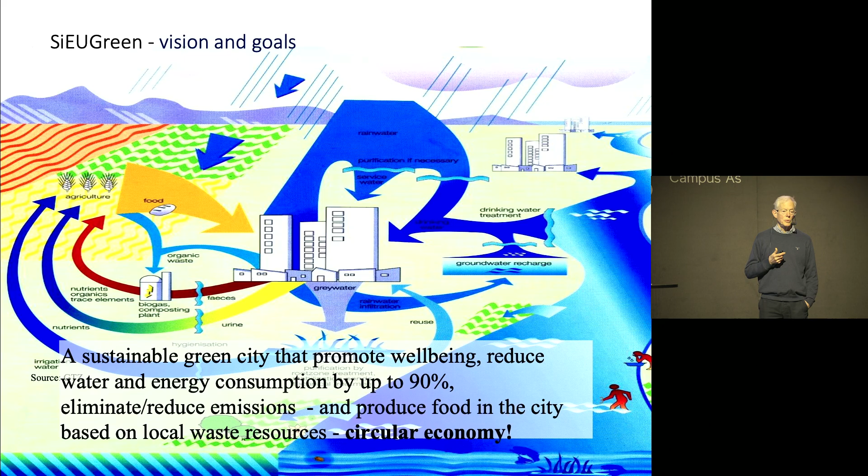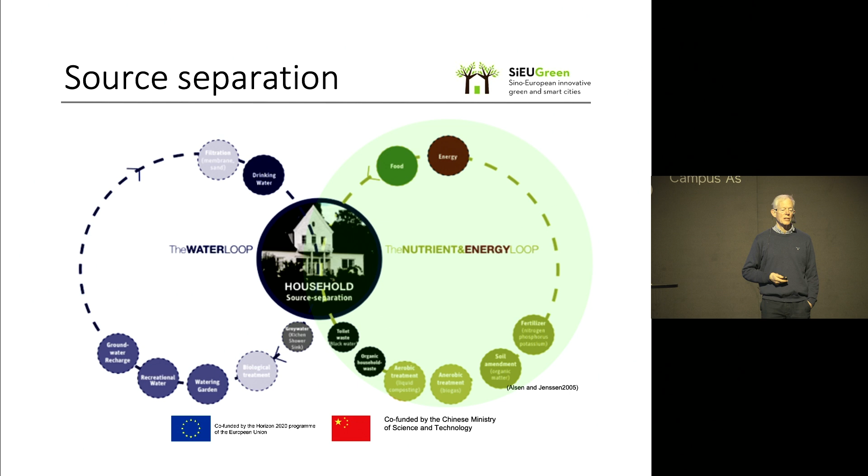So that's circular economy. To do so within the wastewater sector, it's natural to go to something called source separation. I don't know if you know what that is, but that means we take what comes in the toilet, in the loop you see there to your right, and we can make energy, fertilizers, and subsequently food that we return back to society. We can also take the rest of the water and return it to various purposes, even drinking water.

And why is it like that? What we excrete in a day is a mere 1.5 liters, and that contains the majority of the resources: 90% of nitrogen and phosphorus, plus other nutrients, more than half the organic matter, and of course most of the pathogens. And this we mix with 150 liters of water, just make it run through the pipes to the treatment plant.

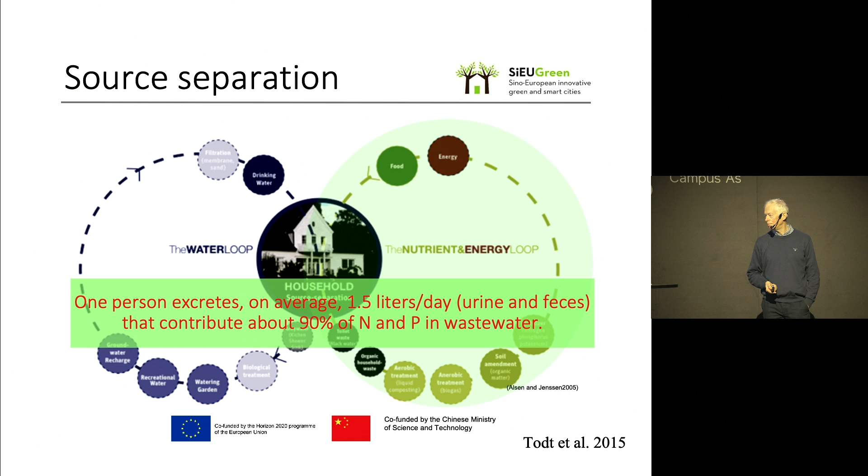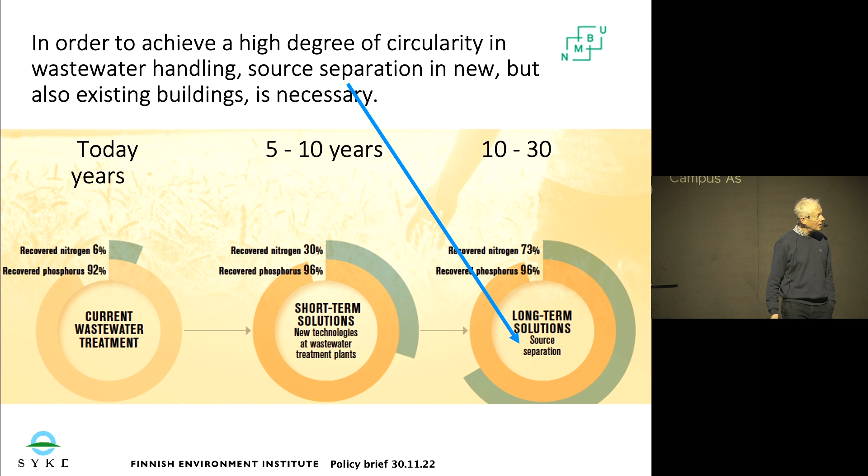If we start from scratch today, I don't think we would have developed a system like that. We would do like we do with solid waste, go to source separation at the source, and then we can have an interesting development. It's also pointed out by the Finnish Environment Institute that if we really want to recycle or recapture, for instance, nitrogen and phosphorus, we need to go to source separation ultimately, not only in new housing areas, but also in existing ones.

And this is what we have demonstrated here at Ås. There is a lab here up on campus, headed by Professor Arve Heistad, who's not here today. And there we took the wastewater from the student housing using vacuum toilets, because we need to use a toilet that uses little water. Vacuum could be one such option.

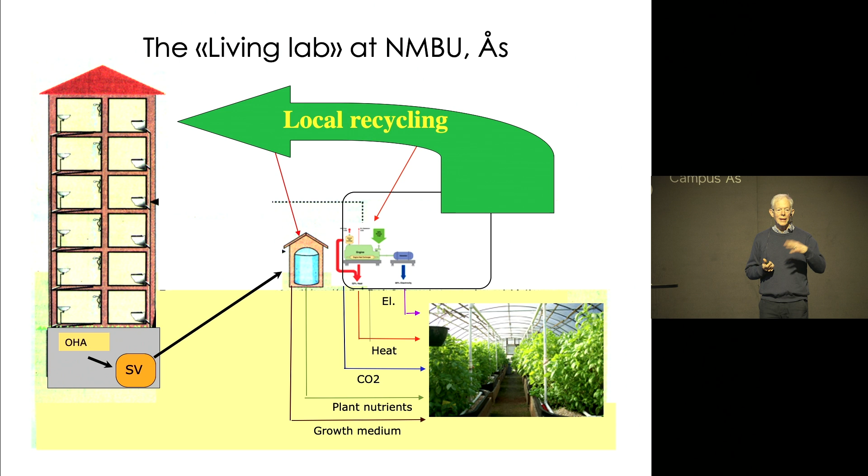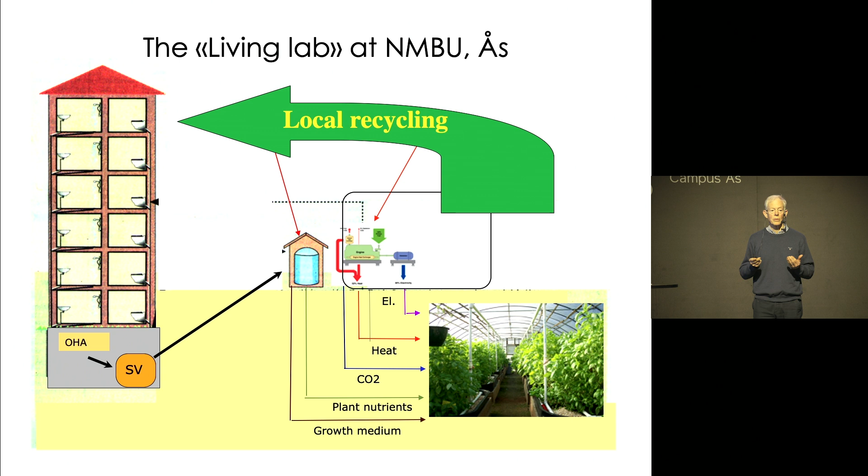And we take this wastewater into a biogas reactor. We could also add the organic household waste to make more biogas. And when we burn off the biogas, we can co-generate electricity. We have heat that can be funneled to a nearby greenhouse. We also have CO2 that can be funneled to the greenhouse, and we have a lot of plant nutrients in various ways that we can use to grow vegetables. And what we filter off, we have composted and made into a soil amendment product.

Melesse has been a very active postdoc in this project, dealing with many interesting developments. Here you see it take the biogas digestate, and he has grown algae. We heard about algae by Dr. Gupta. Algae in our project removed more than 90% of the nitrogen and phosphorus, which was in the algal biomass. Algae can be used as fodder, organic fertilizer, soil improvement, and we heard also other things in the previous talk.

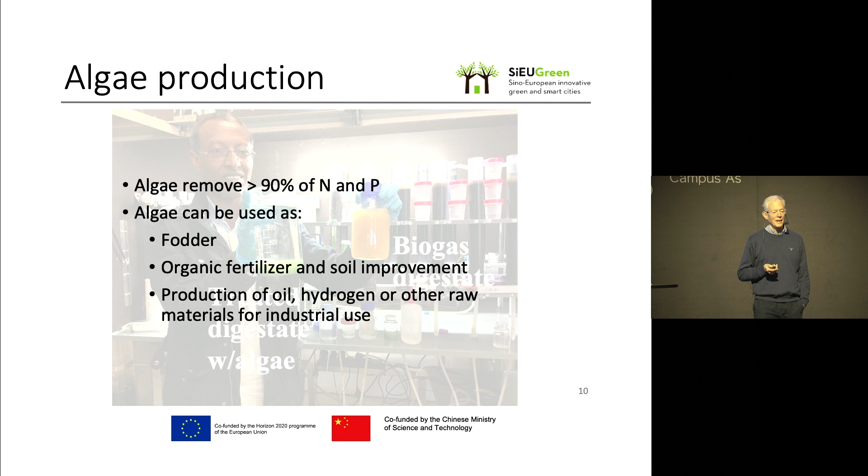Can produce oil, can produce hydrogen, biodiesel you heard, many things for industrial purposes. So here are many commercial options in the green shift, creating new jobs.

We also produce something called struvite from both urine and digestate. Struvite is the same mineral as in kidney stones, magnesium ammonium phosphate, and it's a slow-release fertilizer containing nitrogen and phosphorus.

It's also certified in organic as well as conventional agriculture in Europe. And Melesse has at least four pilot projects, ways of how to generate struvite that can be commercialized. There are commercial systems today, but here are more possibilities, also to do this in smaller scale.

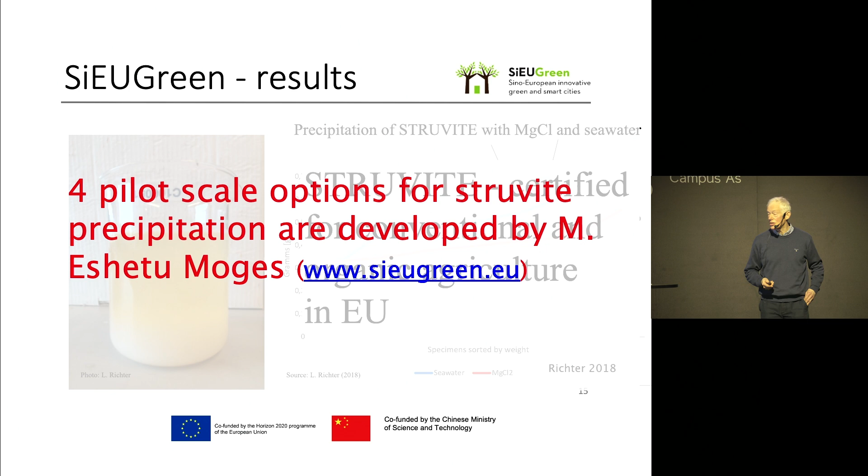We have a greenhouse here at campus, right next to the biogas reactor lab. This greenhouse is insulated by soap bubbles, so we have good insulation in winter, also insulation against heat in the summer. We can grow year-round. That was our goal.

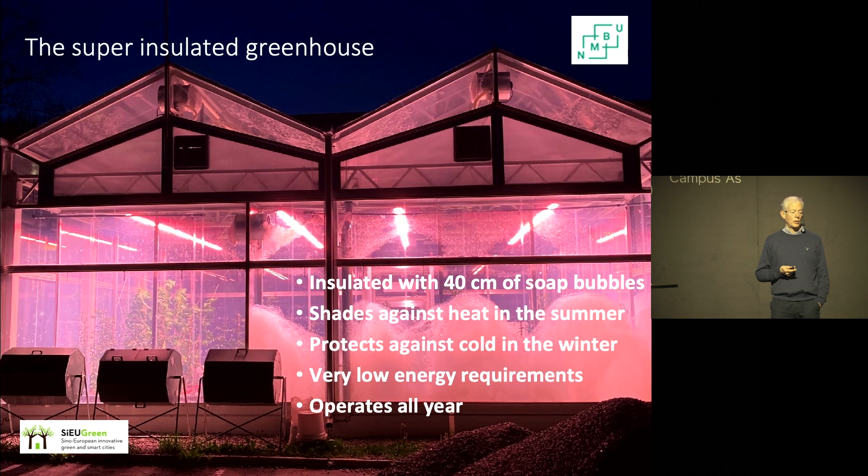Another advantage of this greenhouse is that it has a different ventilation from other greenhouses. You can funnel CO2 there, you can raise the CO2 level, and a higher CO2 level is more optimum for growing plants.

Greenhouses is something I see that will come. This one is from Berlin. I saw in a Swedish commercial paper that many investors in Sweden were talking about producing larger amounts of tomatoes and other crops in greenhouses in Sweden, that this was becoming profitable.

This one in Berlin was on imported resources. We used the waste from the city, and we can grow a lot in a city. This is an example from greenhouses in Norway, 150 kilos per square meter. But imagine if we stack them, we could boost that per square meter.

And in the city of Havana, they produce, not in greenhouses because they're warm climate, 60% of the vegetables that they consume are produced within the city limits.

When we started a project, we didn't think we could produce any energy crops. We did a little experiment with pallet boxes and grew 35 kilos of potatoes per square meter. That equals 350 tons per hectare, which is about 15 times as much as a farmer is happy about if he gets it in his field.

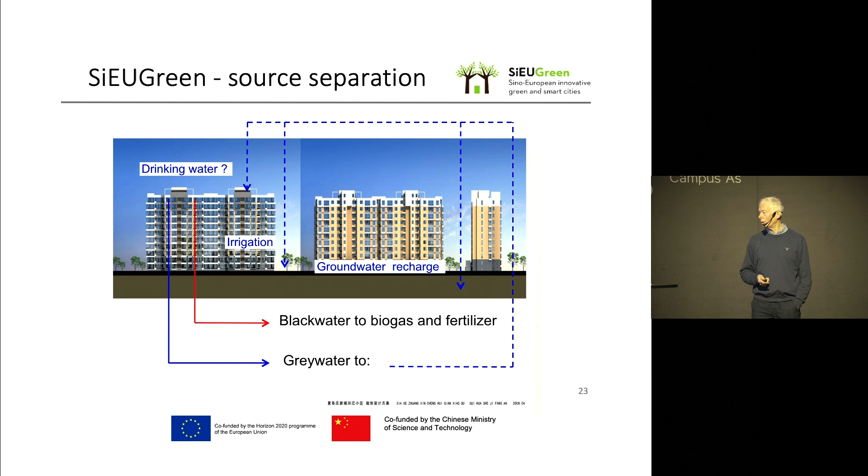We have made biogas and fertilizer from the black water, that is what comes from the toilet. What about the grey water? The grey water, when you use a vacuum toilet, constitutes more than 90% of the water flowing out of the house.

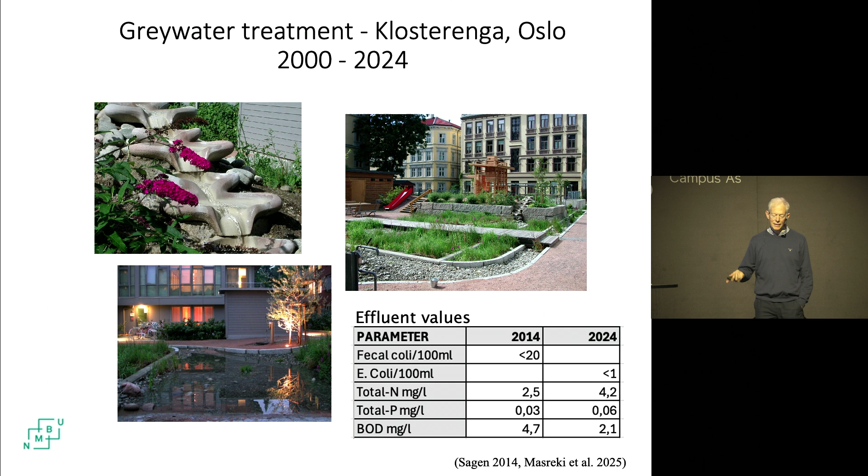And here is a plant in Oslo, in the backyard of a building in Klosterenga, built in year 2000. We had another project at that time. It's still operating, and it's still operating very well.

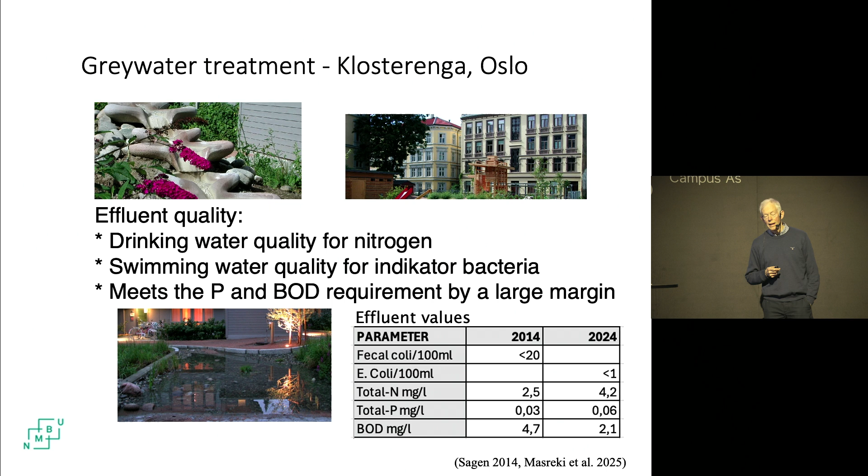It's drinking water quality regarding nitrogen. It's swimming water quality regarding indicator bacteria, and way below the discharge limits for BOD and phosphorus. Think about this water - much better than many raw water sources for drinking water worldwide.

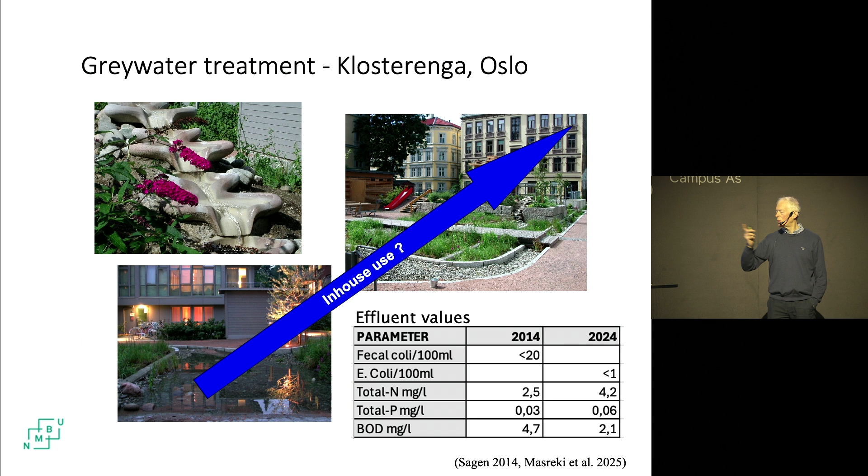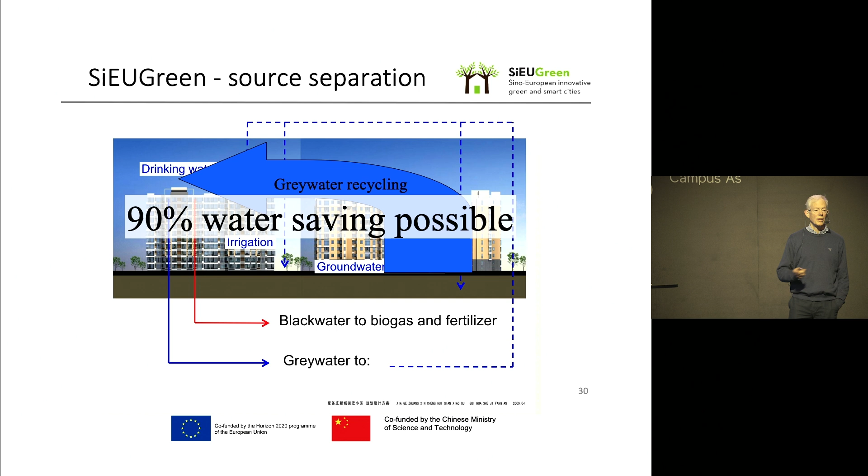So could we make drinking water here? We did. And if the grey water constitutes 90% or more, if we could recycle the grey water and only take 10% new for drinking and food production, we could save 90% of water, which was very interesting for the Chinese. Beijing is running out of water, and that's the case many places around the world.

So, summing up at the Living Lab, we can recycle more than 90% of nitrogen and phosphorus. If we return it as a liquid, we also get all the micronutrients, we get the potassium, and so on. I haven't talked much about it, but this system runs with a net energy surplus.

And it's decentralized. It can be used for new developments within the city. I know that the city of Hamburg, in many cases, need to - if they want to put more people into an area, they need to go to vacuum toilets because the sewers don't have capacity, and it's extremely expensive, as you know, to rebuild sewers.

We see that in Norway now - prices are rising. It's also another point here: it's resilience. This is a decentralized system.

Think about Ukraine. I've been involved in making dry toilet drawings together with a Ukrainian friend for people in Kiev and other cities where they are bombed. What should they do when water is out and the sewers aren't working? With decentralized systems, it's much more resilient in a crisis situation.

It's much harder to do any sabotage. And we need, unfortunately, to think about that now.

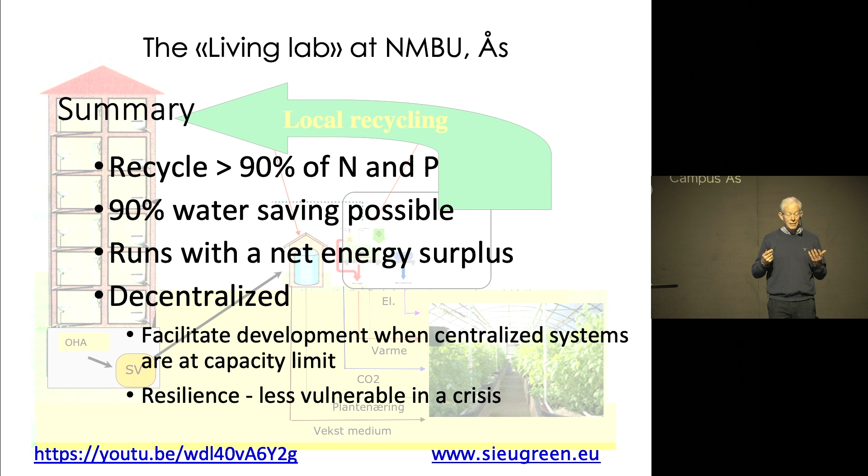So, to sum up, I think future cities can become hubs in a circular economy, where we turn waste into bioenergy, fertilizer, biostimulants, and thus near eliminating water pollution.

And the decentralized water infrastructure that we have demonstrated in the SiEUGreen project can produce potable water, so we can reduce the consumption by 90% if we want to. And also greenhouse gas emissions - we can increase the resilience of the system, and we can have greater flexibility in urban planning. Thank you.

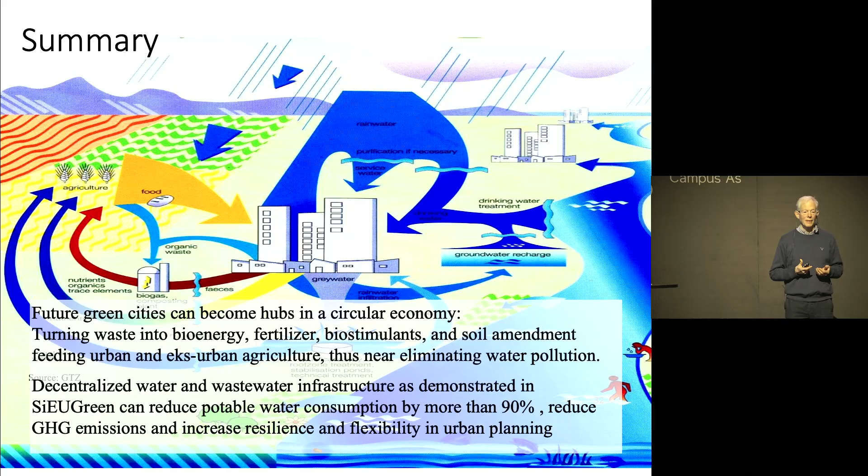Now, Petter is from Trondheim. This to me seems almost as if you are on the verge of obtaining a Nobel Science Prize or something. If this is true, you are really on the verge of a revolution. Yeah, I totally agree, but how for it to come about, that's a question. We have just discussed it down at the table here before I went up. Why isn't it happening? Any comments or questions to Petter?

Yes, there, down here. My name is Tore Hansen. I live in a nearby group of buildings called Kaja. Petter used to live there before. When we moved in 1993, we had to renovate our water and sewage system in the house in 1995. Then I asked Ås kommune if they were looking at Petter Jenssen's studies here at NMBU at that time. He had newly built the system he was showing by the student dwellings, but Ås kommune didn't actually know about this, and they didn't recognize the need to divide black water